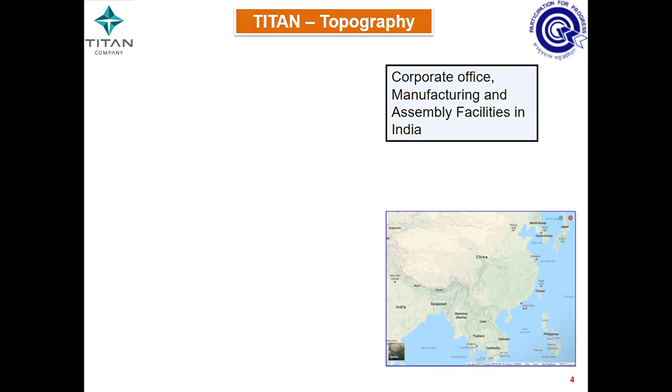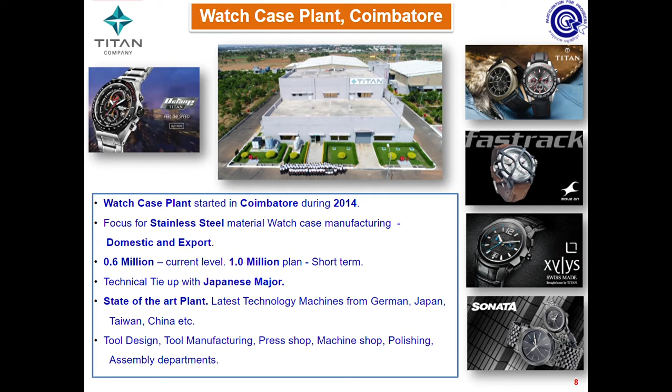Watch Case Plant Coimbatore started in 2014. We are mainly focused on stainless steel watch case manufacturing. These are the parts inside your watches.

We are from Team InnoGreen. Our team was Green Initiative. The team members are myself, Marudu Bandi, and Mr. Suresh. This was the case manufacturing process flow.

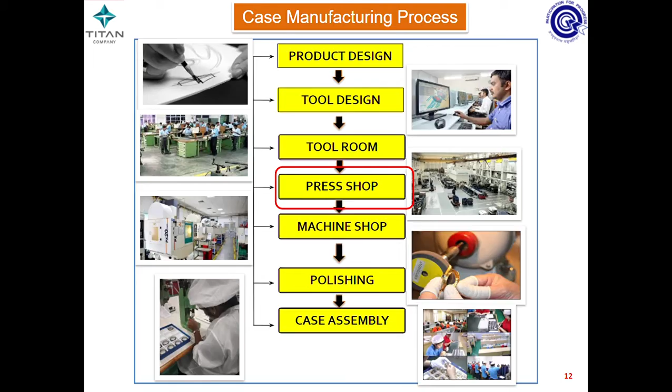We are choosing our project in the press shop. We adopt the quality circle 12 step for this project.

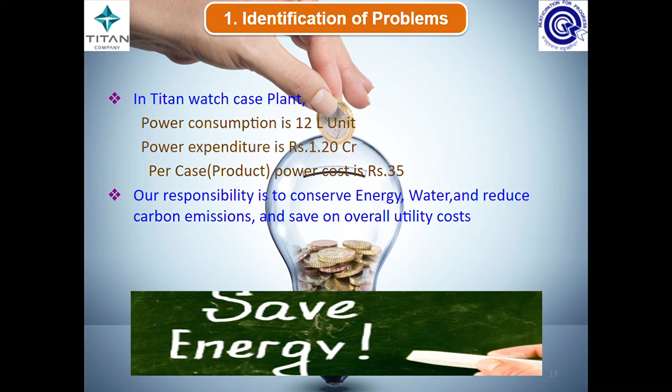In Titan Watch Case Plant, we are consuming 12 lakh units per year. It costs around 1.2 crores.

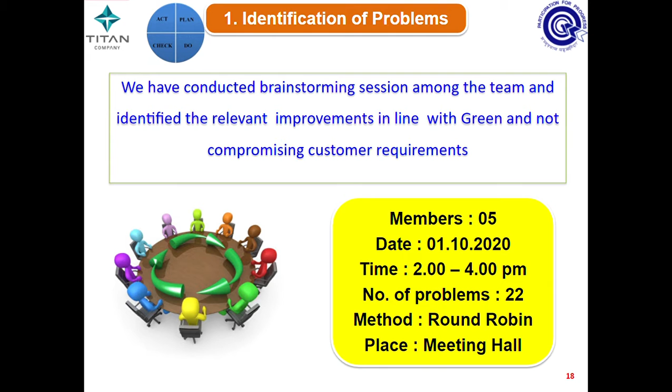So it is our responsibility to conserve energy and reduce carbon emissions. So we conduct a brainstorming session to identify the improvement areas in line with the green initiatives without compromising the customer requirement. In the session, 22 improvements are identified.

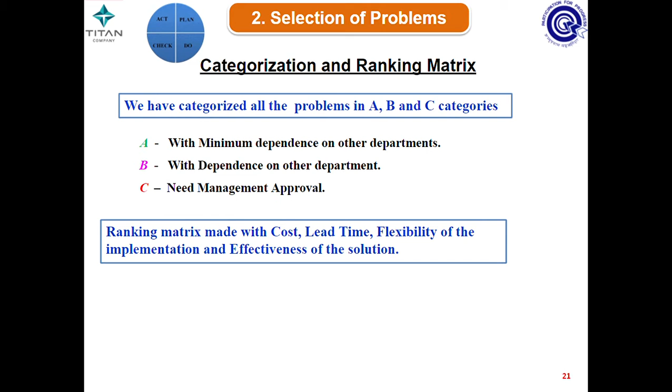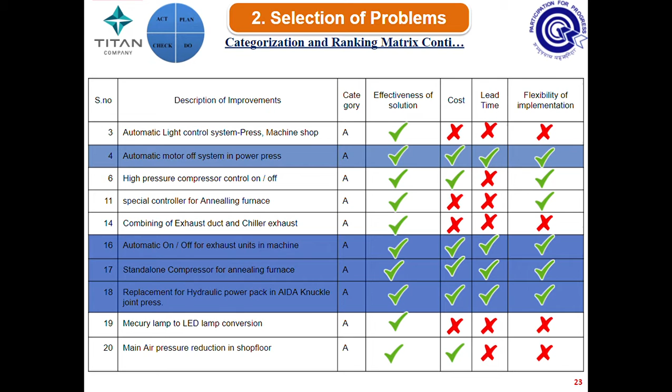We categorize those ideas based on cost, lead time, and flexibility of implementation. The categorization was shown here. Based on that categorization, we are choosing 4 improvements for implementation.

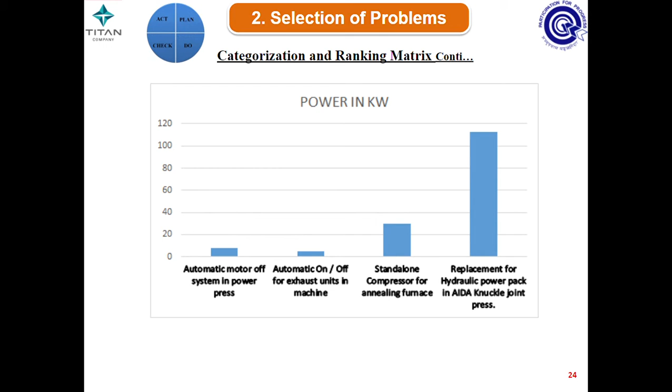In those 4 improvements, first we noted each one was consuming more power. Based on the bar chart, the hydraulic power pack in the Aida knuckle joint press consumes more power. Based on that bar chart, we decided to solve the problem on top priority.

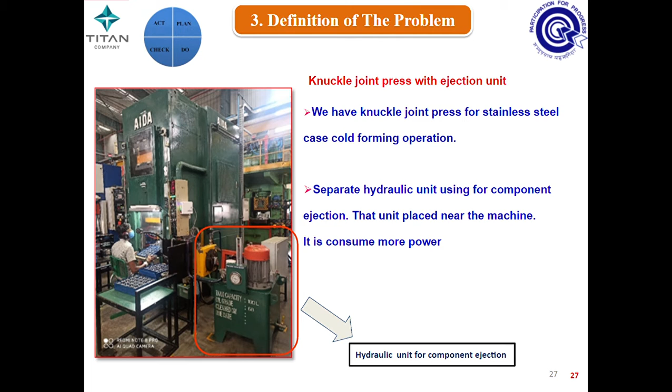This was the actual image of the Aida knuckle joint press. It was used for stainless steel watch case cold forming operation. The hydraulic power pack unit was used to eject the component.

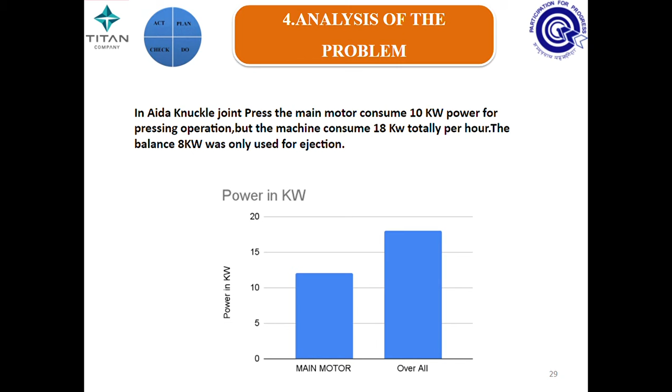In the Aida knuckle joint press, the main motor consumed 10 kilowatt per hour for the pressing operation, but the overall machine consumed 18 kilowatt per hour. The balance 8 kilowatt was used only for the ejection function.

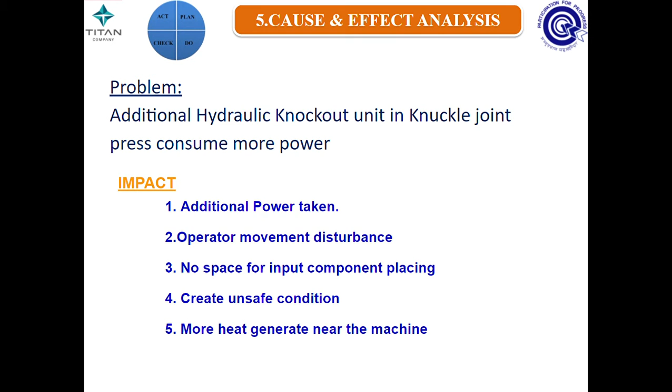It needs to be reduced. In addition to that, the hydraulic power pack also creates some impact in the shop - additional power taken, no space for input component placing, and more heat generated near the machine.

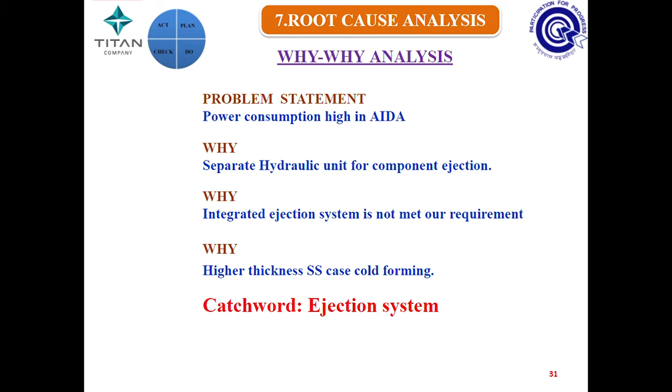To find the root cause, we are using the why-why analysis. The catchword was the ejection system. To generate ideas, we are using the brainstorming method. In that session, 10 ideas are generated.

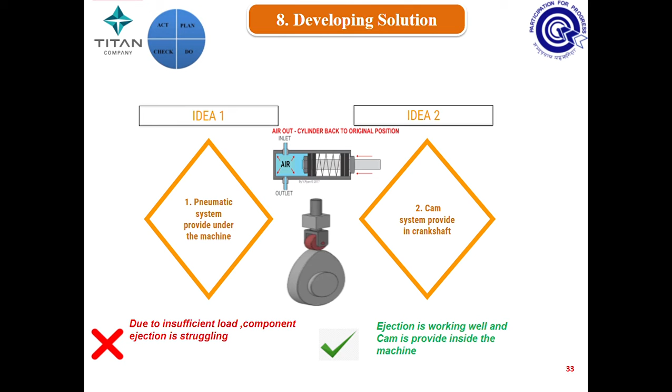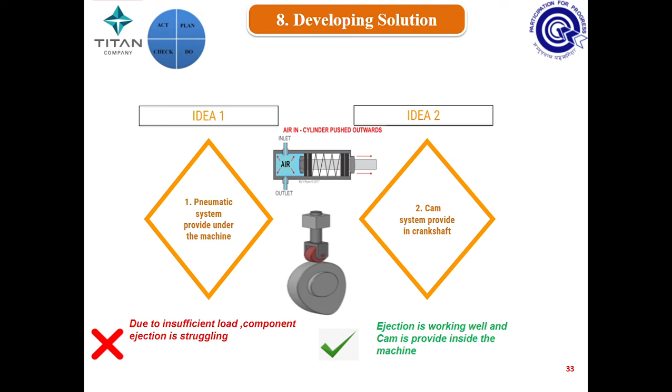The first one was to provide a pneumatic system under the machine. It did not produce enough load, so it was dropped. The other one was to provide a cam system in the crankshaft to eject it. It was working fine, so we chose the second one for implementation.

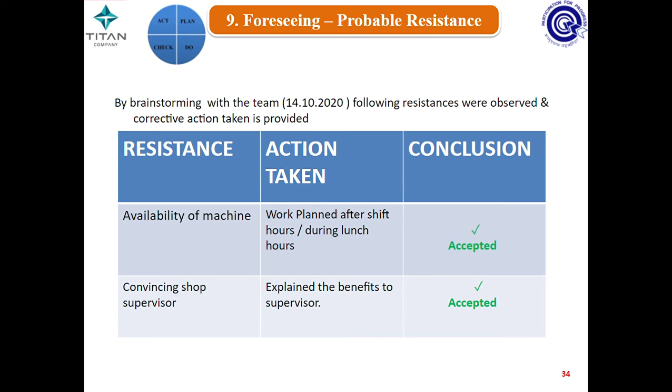Before starting the project, we forecast any problems that may come while implementing. Those are solved as shown here.

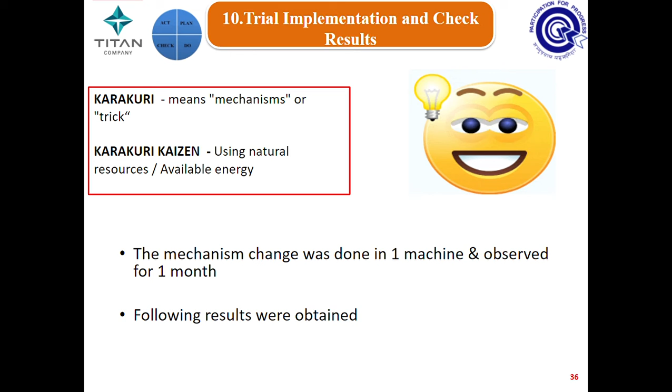We are implementing this project using the Karakuri method. We are implementing the CAM system in one machine and observed it for 1 month. The results are shown here.

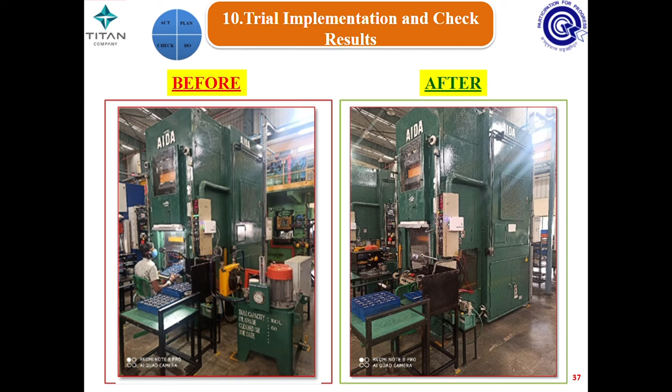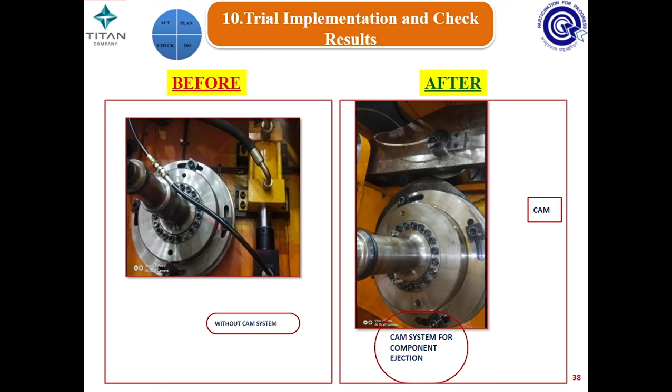In the before image, the hydraulic power pack unit was shown near the machine. After that, the unit was replaced. Before, the component was ejected using the hydraulic cylinder. After that, the hydraulic cylinder was replaced with the cam system.

The Kaizen was started on 12-10-20 and ended on 24-10-20. The cost spent per machine was around 1.5 lakhs. After that, the main motor and overall machine power consumption are always equal.

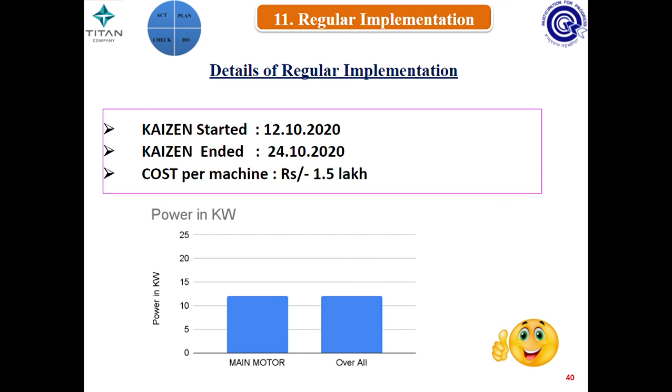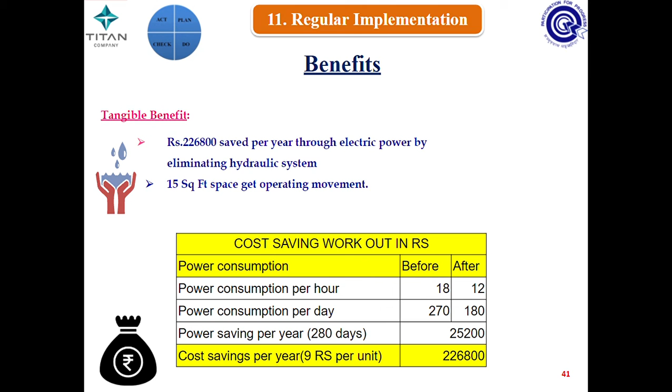The intangible benefits are: employee fatigue reduced, improved team confidence, and a safety work environment was created.

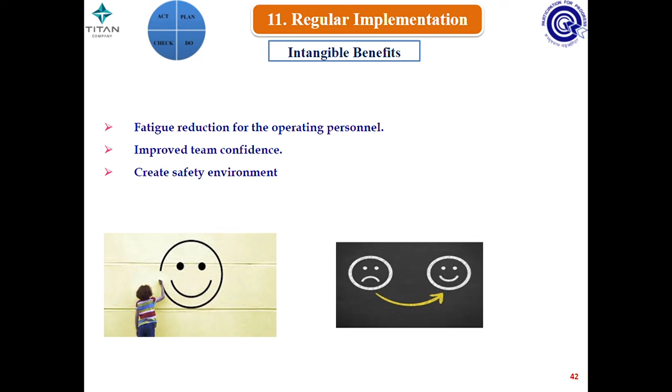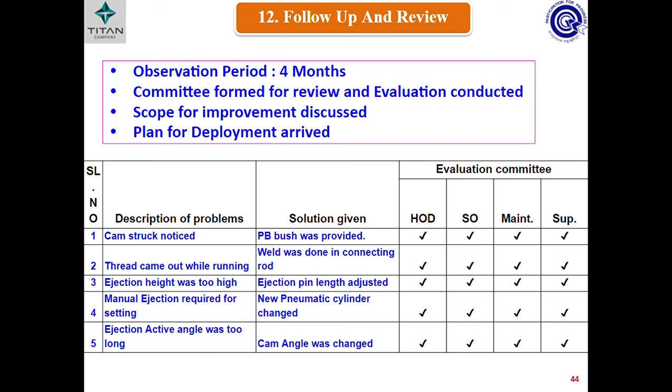After that implementation, we continuously observed the machine. During that period, some issues were noted. They are solved, as shown here.

After the successful implementation, the same system was horizontally deployed to another machine on 28/6/21.

We have learned some things during the implementation: always think simple, explore the opportunities inside, and utilize the available resources. Thank you.